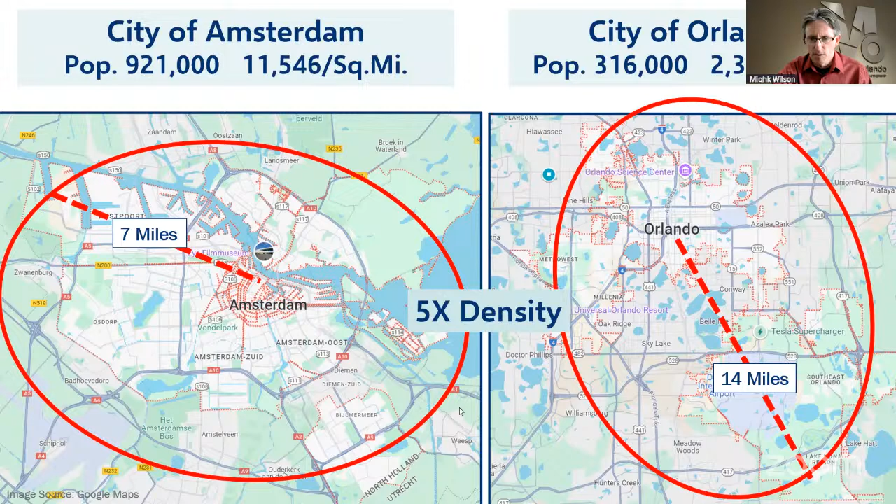What that means on the ground is that a typical bicycle trip in the Netherlands is only about 1.5 miles. Look at what the land use looks like 2 miles from the city center of Amsterdam, the density there. This is a residential street. Whereas look at the street 2 miles from the center of Orlando. So right there, we've got a lot more people within easy biking distance of key destinations.

And then a really important factor is transit. This is a bicycle parking garage in Amsterdam, right next to their main train station in the center of town, and also the ferry terminal. If you think about the distances those trains are going, without the transit, how many of these bicycle trips would happen? A lot of those bicycle trips would disappear because the transit-bicycle combination is so powerful.

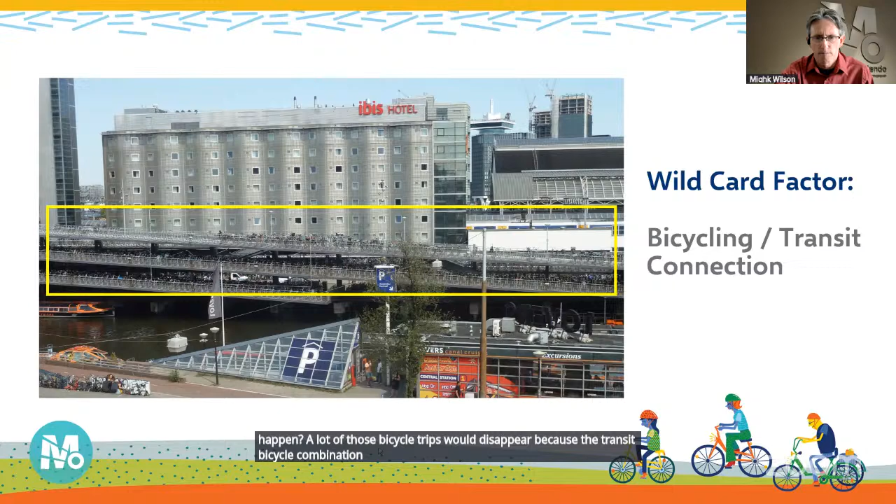I'm going to bring it back to the Orlando area and look at some of the data we've been collecting. We use a camera system called Miovision, which has allowed us to do bicycle and pedestrian counts. We've got close to 100 locations now, but I'm just looking at 80 locations where we're looking at bicycling along a roadway, whether it's a street without any bike facility or one with a bike lane or a side path.

Hey, Mighk, sorry to interrupt. Are you sharing your screen? I'm not seeing a shared screen. Is anyone else having an issue with my screen? No, I see it. This is Judy. You may need to check your view, David. I don't use Zoom all that often anymore, so I apologize, everyone. Sorry to interrupt. Okay, no problem.

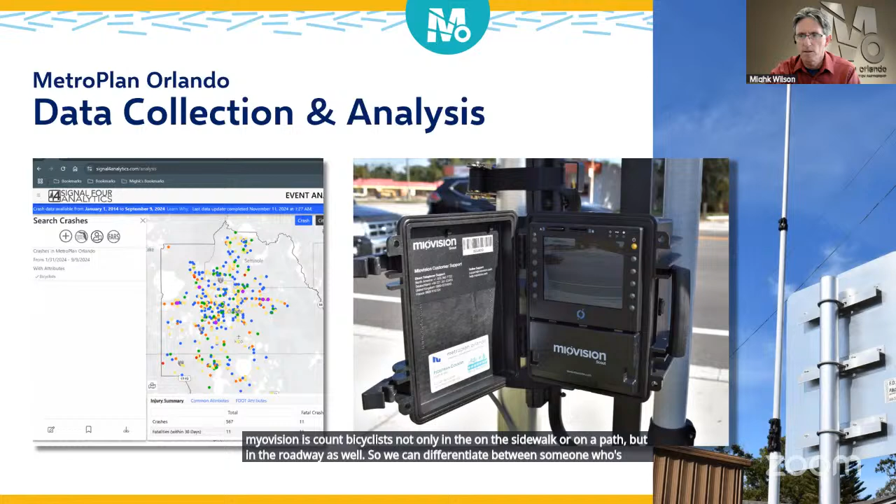But one of the things we're able to do with Miovision is count bicyclists not only on the sidewalk or on a path, but in the roadway as well. So we can differentiate between someone who's in a travel lane, a bike lane, sidewalk, or a side path. And again, these are the data points that we can analyze. So having exposure data from Miovision really helps us to understand the risk of different crash types based on the area characteristics and the bicyclist characteristics and behaviors.

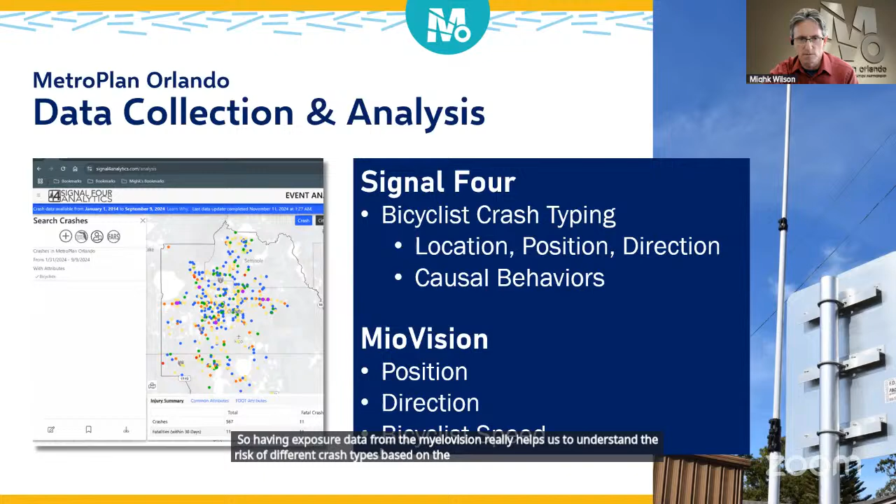Before I get into crashes involving motor vehicles, we also need to think about crashes that don't involve motor vehicles. We've got data from the Florida Injury Surveillance System showing for our metro area that close to 3/4 of cyclist ER visits don't involve a motor vehicle. That probably wouldn't be very surprising, right? Little bumps and bruises, scrapes, etc. But even hospital admissions, something serious enough where you need to be admitted, over half of those do not involve a motor vehicle. So what sort of things can contribute to that?

Well, surface hazards, pavement problems, obstacles, anything that's protruding upward, posts, poles, benches, etc. Mechanical issues on the bike, crashes between cyclists, crashes with pedestrians, animals, primarily dogs, and then sometimes it's just poor bike handling skills. And none of these are going to show up in our crash data because if there's not a motor vehicle involved, it's very rare that we see a crash report for those types of incidents.

So let's look at the risk factors for bicycle crashes. The first and foremost is conflict frequency. 95% of our crashes involve turning and crossing movements, either the bicyclist or the motorist violating the right of way of the other. And so most of our crashes would be happening at intersections and at driveways where you have those crossing movements. Motor vehicle volumes. If you reduce the number of cars, that's going to reduce the overall risk. And we actually saw this play out during COVID. There was a big drop in automobile traffic.

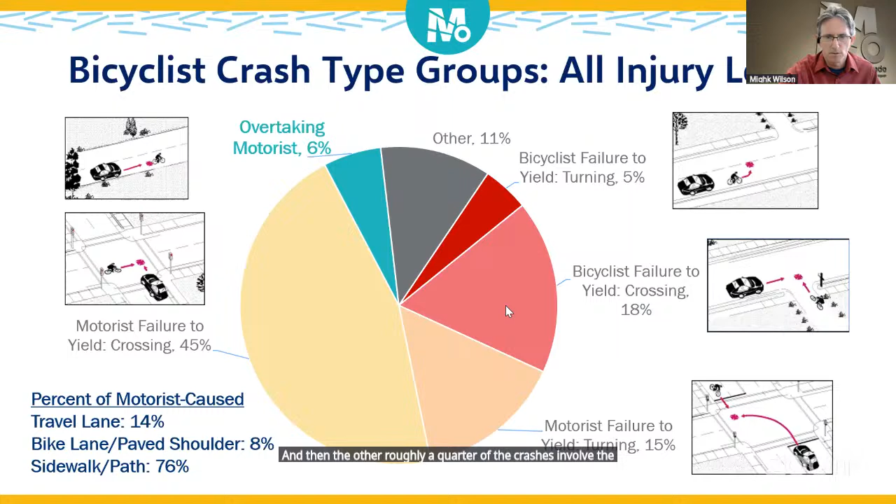Now, this is all crashes overall. We'll get into the more severe ones in a bit. And then the other roughly 1/4 of the crashes involve the bicyclist's failure to yield, turning or crossing the path of the motorist. So as we move up to the more severe, KSI, meaning killed or serious injury, we see that overtaking becomes a bigger proportion. Motorist failure to yield starts to decrease while bicyclist failure to yield increases. And that's because we're talking about more mid-block locations with the bicyclist crossing where motorists are moving fast.

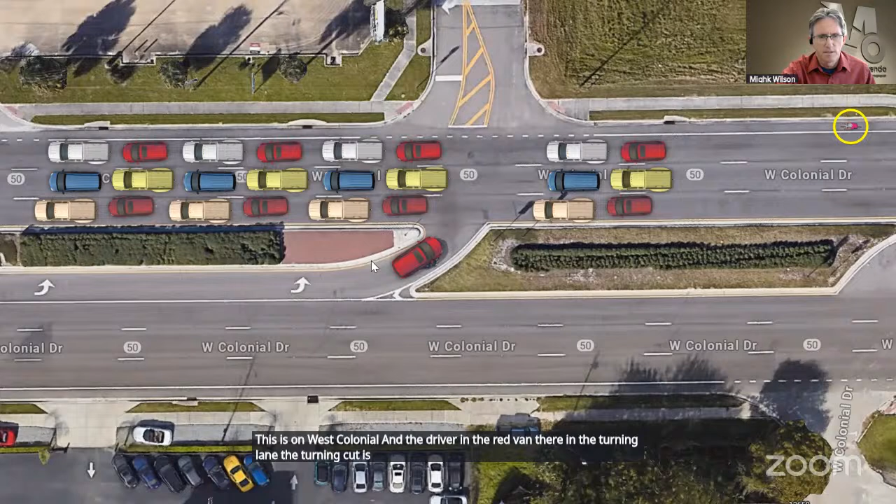And the driver in the red van there in the turning lane, the turning cut, is getting ready to go across. You see all the stopped traffic. And then there was a bicyclist coming on the bike lane. It was actually an e-bike rider who reported his speed at being about 25 miles per hour. And this was the result. The motorist could not see the approaching bicyclist because of stopped traffic, and the bicyclist couldn't see the motorist for that same reason. And so we have a blind situation compounded by the high speed of the cyclist.

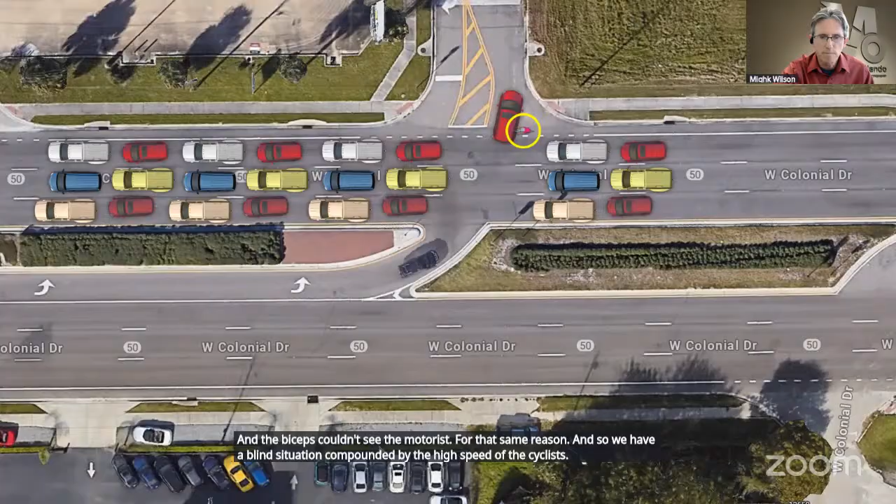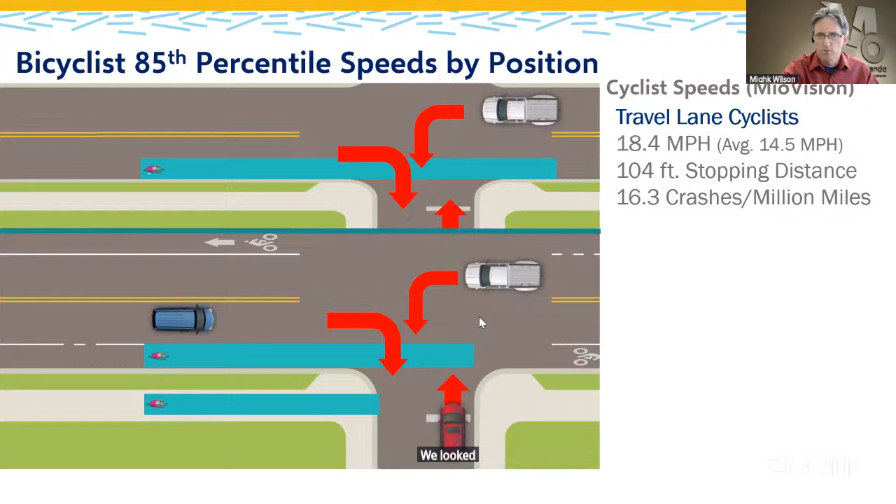So we actually were able to quantify this risk factor using our Miovision cameras and our crash data. We looked at the speed for travel lane cyclists, bike lane cyclists, and sidewalk riders. So by 85th percentile, what I mean is that up to 85% of the cyclists are going at that speed or lower. So for travel lane cyclists, 18.4 miles per hour is the 85th percentile. And at that speed, a cyclist needs about 100 feet of stopping distance. And you see the crash risk there based on the exposure data that we have, about 16 crashes per million miles.

For bike lanes, a little bit slower cycling speed and a little bit lower crash risk. And then for sidewalk cyclists, slower still at 12.5 miles per hour. And the average you see, they're only about 9.5 miles per hour. And you can see that the risk there is about half of that of travel lane cyclists. And this is just looking at the turning and crossing movement crashes for cyclists going with the flow of traffic. So it doesn't look at overtaking crashes, doesn't involve cyclists going against the flow. So just isolating for the cyclist speed and position, we see this kind of outcome.

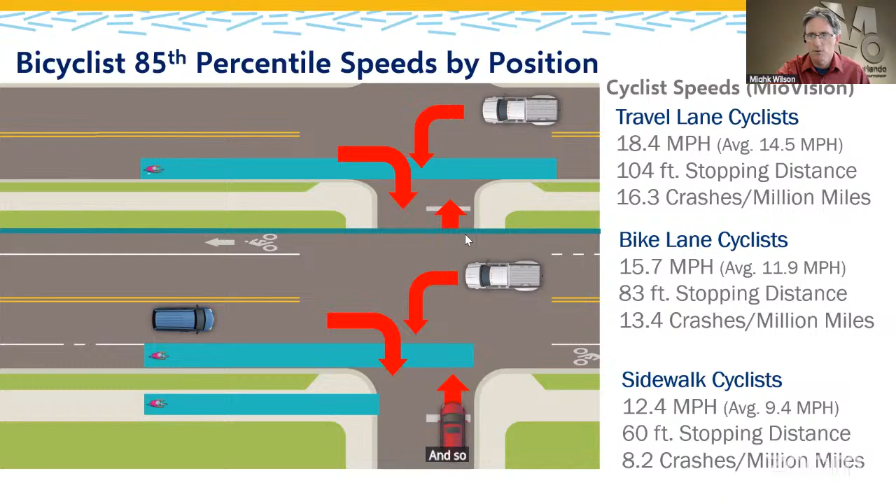So really, it's not that the sidewalk or the bike lane makes the cyclist safer. It's that the cyclist makes those facilities safer because they are slower. And so when a motorist violates their right of way, they don't need the stopping distance that a faster cyclist would need. So why is this important? Well, it's because this is where 60% of our crashes happen and 40% of our KSI crashes. So bicyclist speed is at least a potential factor for a significant portion of our crashes.

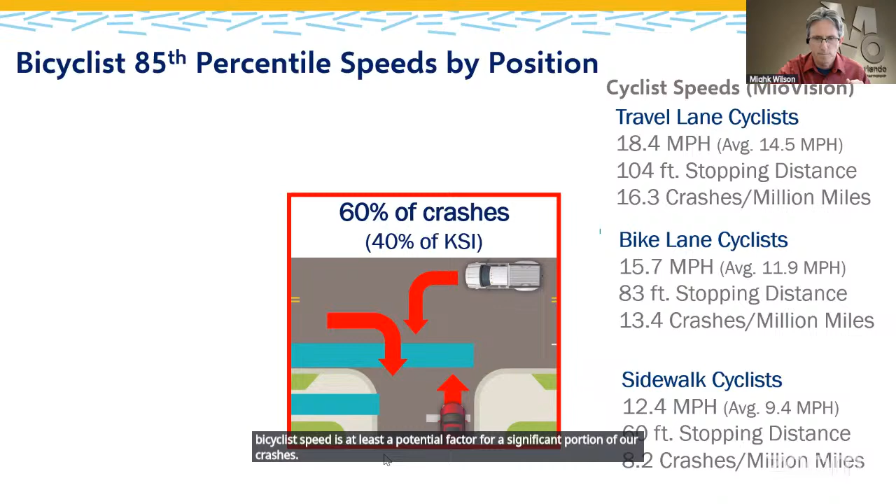So what if we move faster bicyclists off the roadway and onto a side path or a sidewalk? Well, that's actually what's happening right now with e-bikes. It's not so much that we're moving them, it's just that the sidewalk riders are getting faster. Well, before the advent of e-bikes, we were doing a study on Silver Star Road, across the board traffic safety study. And I was looking at the bike and pedestrian crashes along this corridor. And one thing that jumped out at me was a bunch of right hook crashes. So a right hook is where the motorist and the bicyclists are going the same direction, and the motorist turns right across the path of the bicyclist that they just passed.

And typically, this is actually a very low risk crash for sidewalk riders because they have plenty of time to react and they're not going very fast. And so it doesn't happen very often. But here we had quite a cluster of right hook sidewalk crashes, which got me scratching my head until I realized, oh, there are hills on Silver Star Road, unlike most of the bigger 6-lane arterials in our area. So I looked at where these crashes happen in relation to the hills, and sure enough, virtually all of them involved a downhill bicyclist. There was one travel lane cyclist you see called out there, and there was one other right hook that didn't involve a downhill cyclist. But that cluster that you see of 3 there in the center, again, those are all coming downhill, and all the others really.

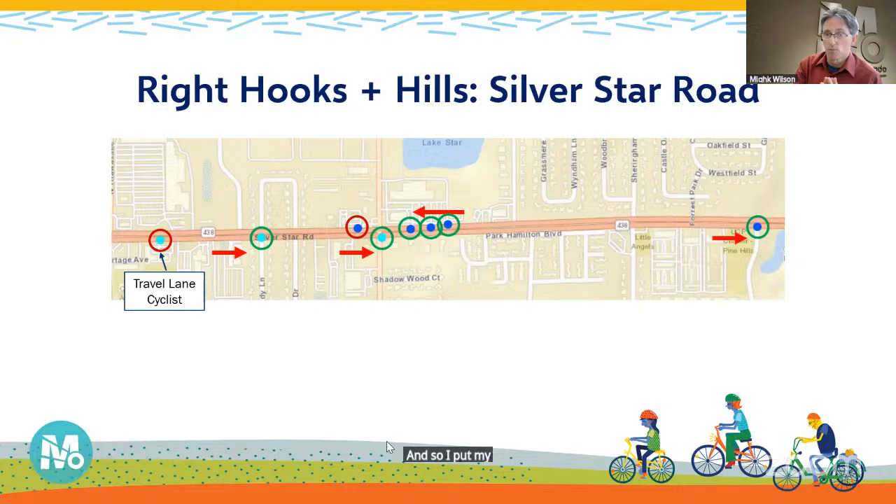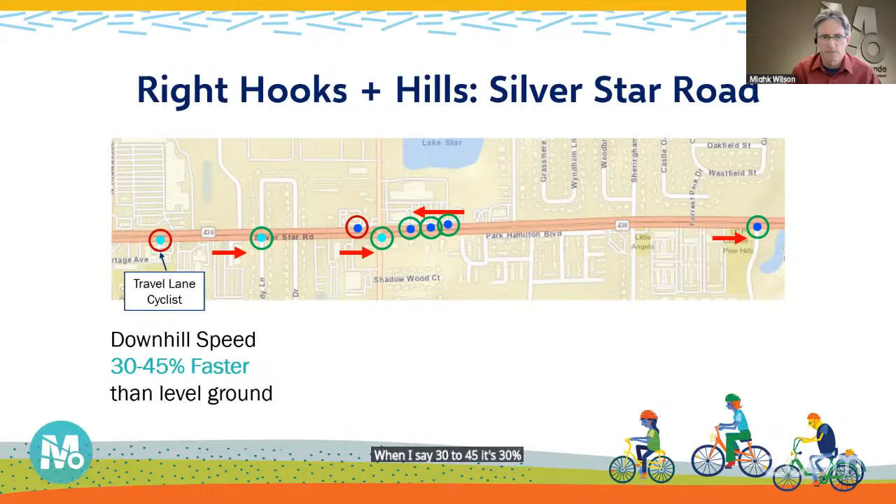And so I put my MioVision cameras out to see what the sidewalk speeds were like for these cyclists. And found that they were going 30 to 45% faster than cyclists on level ground on similar arterial roads. When I say 30 to 45, it's 30% for the average and 45% for the 85th percentile. So what does that get us from a crash risk standpoint? Well, it meant that the crash risk went up 15-fold for right hook crashes, just by cyclists being a few miles per hour faster.

And the overall crash risk for cyclists going with the flow of traffic was 7 times greater. So increasing the speed of sidewalk riders is going to increase our overall crash risk.

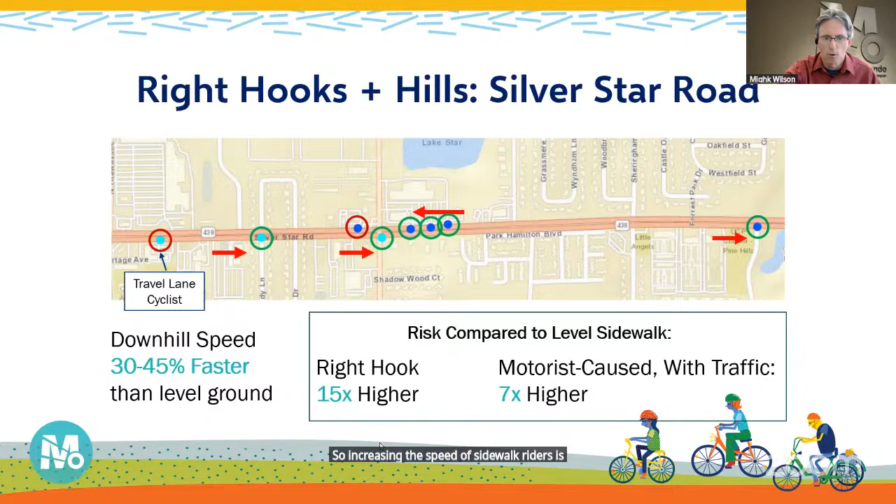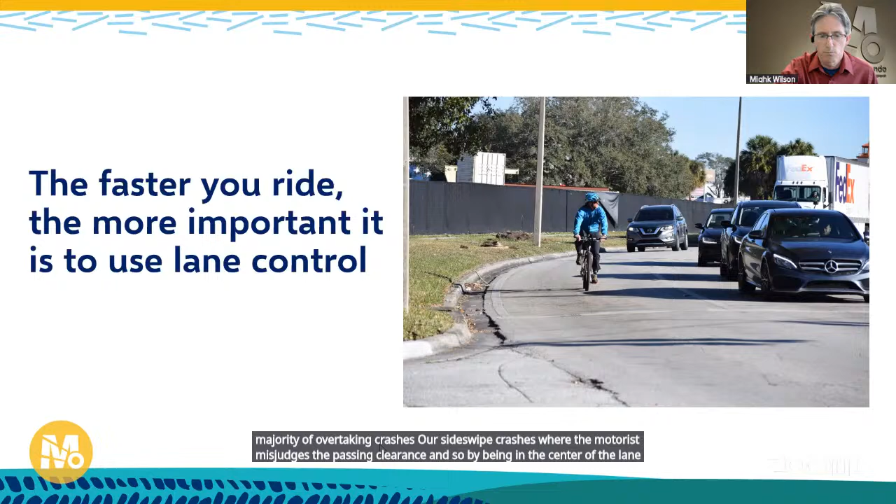And this also improves with overtaking crashes, because the majority of overtaking crashes are sideswipe crashes where the motorist misjudges the passing clearance. And so by being in the center of the lane, it greatly reduces the overtaking crash as well.

All right, and so let's do another break here. I see a couple of questions. Yeah, Mighk, we had a few things in the chat. Patricia was asking about the location of that right hook cyclist crash, local crash that you pointed out. She wondered if it was Silver Star and Powers Drive. Was that the? Yes, just east of Powers Drive on Silver Star.

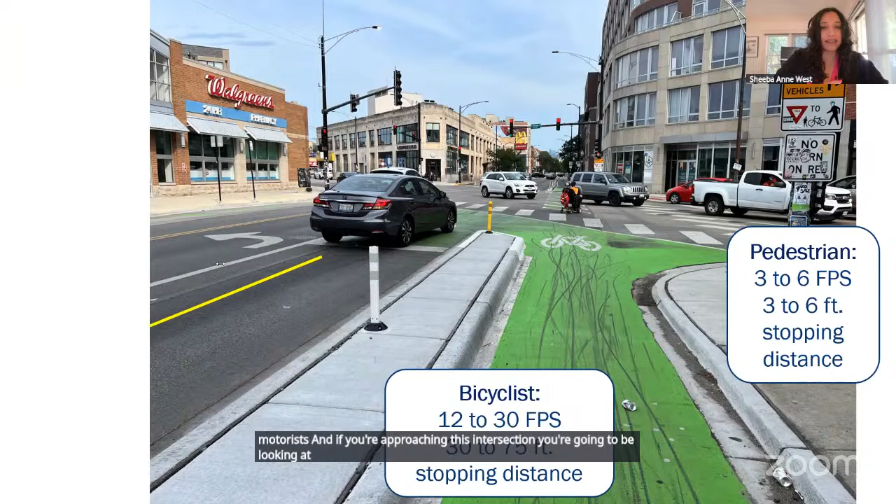Right? And you know, I'm curious why the sign is on the right, why there's no right turn on red. So there's some signage coordination. I think the bicyclists don't get treated on the same level as the motorist here, and you can see that with the signage. And then I guess another question, so there are specific questions about this intersection, but I know that there are a lot of other places where there's not a lot of right turns on red as a policy.

All right, so let me explain here. You make a good point about the signs. It would be more effective, for example, if they were in that divider between the travel and the bike lane. However, right hooks are, first off, not a right on red problem, unless the bicyclist is violating the red light. If the bicyclist is crossing the road, that's not by definition a right hook crash. Right hooks tend to be on the stale green.

In other words, basically the signal has been green for at least 5 seconds or so, and all the traffic is already moving. And it's particularly a problem when the motor vehicle traffic is moving somewhat slower and the bicyclist is going faster and passing that vehicle traffic. So both parties have a green light, both are allowed to go forward, but the driver has to check and clear that bike lane before proceeding. The sign might help on that, but one of our principles in Vision Zero is that human beings make mistakes, and so it's a mistake that happens all too often.

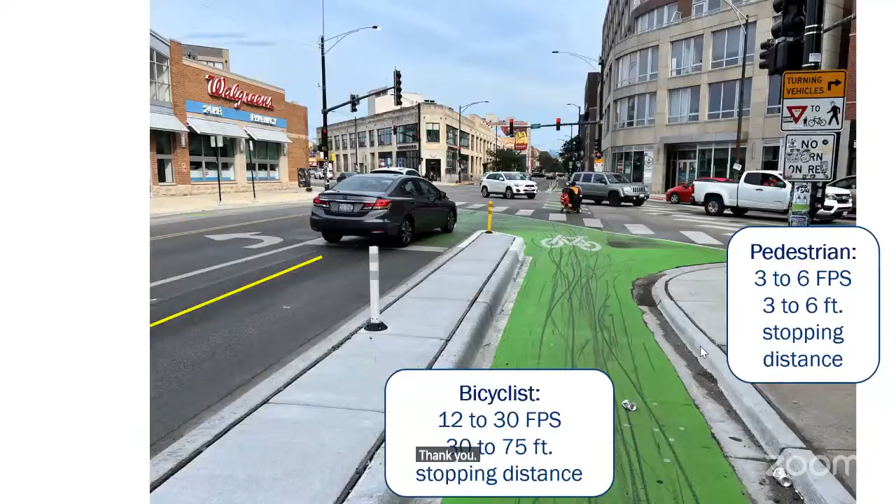Thank you. Welcome. I don't see any more hands or comments. Anybody else? Feel free, folks, jump in if you have anything to say.

All right, I think I'll move on to our final section here to talk about reducing risk. Back to my comparison of Orlando and Amsterdam. So I showed you those conflict risk factors earlier, when we're looking at conflict frequency. In Orlando, you're going to have a lot of commercial driveways, unsignalized intersections. It's a more suburban type of environment. Whereas in Amsterdam, more of the intersections are either signalized or are roundabouts. You don't have a lot of driveways. Commercial access tends to be on side streets. And so that inherently reduces the amount of conflicts or makes the conflicts more manageable.

With motor vehicle volumes, again, another risk factor there, here we're looking at roads in the range of 30 to sometimes over 50,000 cars per day. Whereas in Amsterdam, the highest traffic amount I saw was 25,000. Most of their streets are under 20,000 cars per day. Motor vehicle speed, this is a huge one, especially when it comes to serious injuries and fatalities. We have a lot of roads posted at 40 to 50. In Amsterdam, it's a citywide speed limit of 30 miles per hour, and their neighborhood streets are posted at 20.

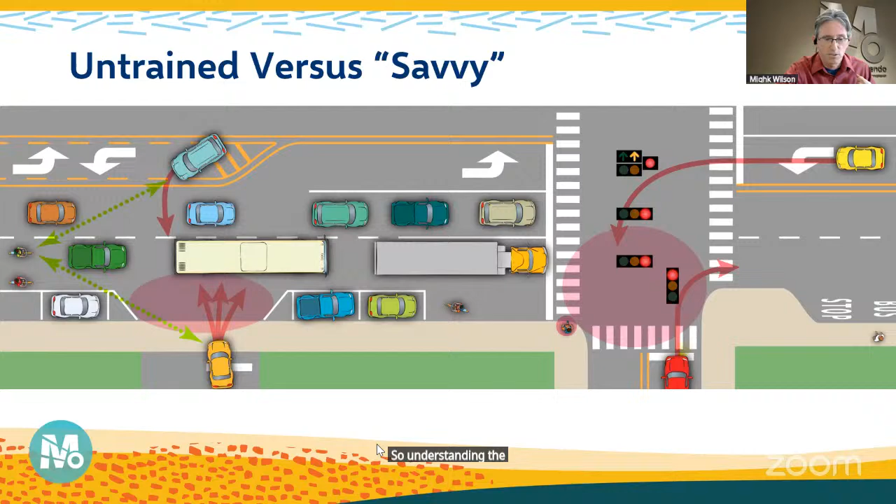So getting into a little bit of review here, overall, for bicycling use, increased cycling is primarily driven by land use and geography and demographics. Bicyclist crash risk, we have to look at conflict points, bicyclist direction, motorist speed and darkness for the more severe crashes, and then bicyclist speed and their lateral position for the motorist failure to yield crashes.

So if we're looking at risk reduction, what can we do? From an infrastructure standpoint, our key focus really should be on reducing motorist speeds. That's going to give us the greatest impact for reducing serious and fatal crashes. And along those higher speed, low conflict corridors, that's where separated facilities can be useful and improve safety.

But let's not forget the bicyclist behavior. Having cyclists understand they need to go with the flow of traffic, even if the law allows them to go against the flow on the sidewalk. They need to understand this relationship between the environment they're riding in and their speed and the conflicts, and ensuring that they are conspicuous based on the circumstances that they're in.

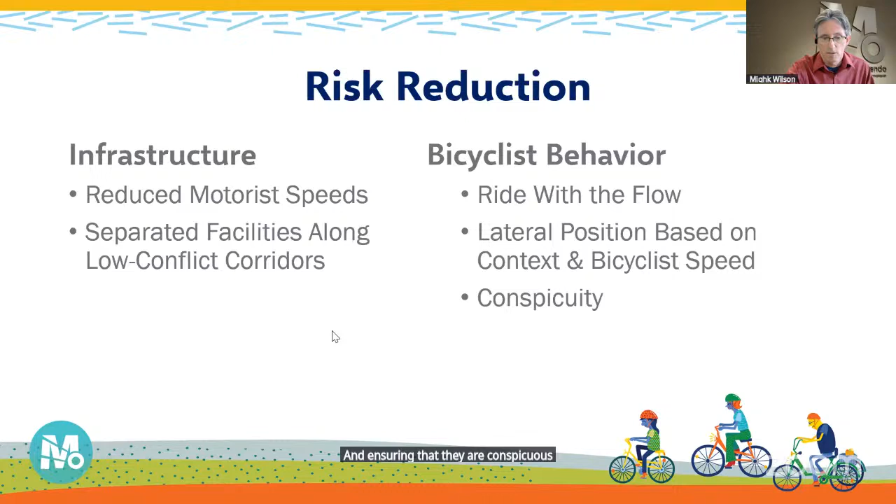And I want to leave you with one last thought here. Just for comparison, I took a look at the cost of the shared use paths that we are building in our area through our transportation improvement program. And on average now, it's costing about 3 million a mile to build a shared use path. And many of these are side paths, adjacent to a roadway.

Now, I want to estimate the cost of cyclist education here. And it's really hard to get people to take a bike safety course. Most people don't know what they don't know, or they think, I'm safe, what do I need a safety course for? It's the motorists that need a course. Well, what if we paid people to take a course? If I was able to pay them $15 an hour to take a 10-hour course, we might get some takers for that. And then we'd need some additional funding for paying our instructors and marketing, et cetera. We could reach 10,000 bicyclists for $3 million.

And think about what the impact would be of that. Spread 10,000 highly trained cyclists throughout a region. So anyway, food for thought. And so I think the key takeaway from today is that both the choice to bike and the risk for cycling are affected by a plethora of factors, not just bicyclist accommodation. So it's the behavior and the context and the design altogether.